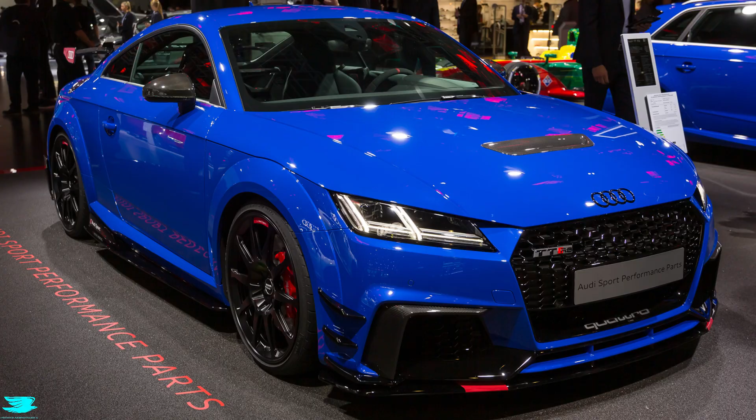The Audi TT RS is a sweet car, and it can go from 0 to 100 in just 3.7 seconds, way faster than I expected at least. But its body kit from an aerodynamics point of view has some good points, but is pretty bad overall.

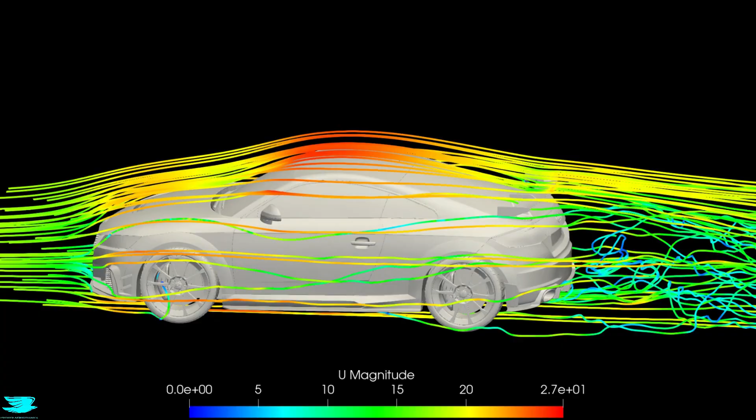And I feel bad for saying that because one of your amigos, George, commissioned us to simulate his car. It's the truth though. As we'll see, there are two major flaws and one minor one. But the good news is that we'll also cover some easy ways to fix these flaws. So George, sorry dude, but hopefully these fixes will make up for it.

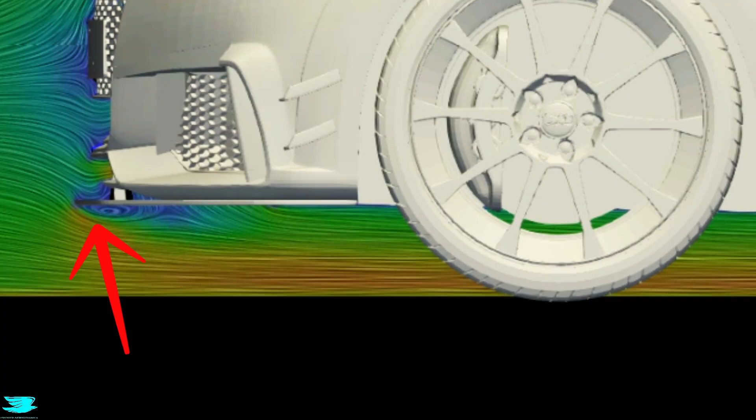The Audi TT RS has some sweet additions. It has a cool front splitter, a diffuser with strakes, a large rear wing with swan neck supports. They're really cool. They're those supports that wrap over the top of the wing. And my favorite, this vent in the hood. For those interested, we actually did the regular Audi here a while back. This is the improved version, the RS.

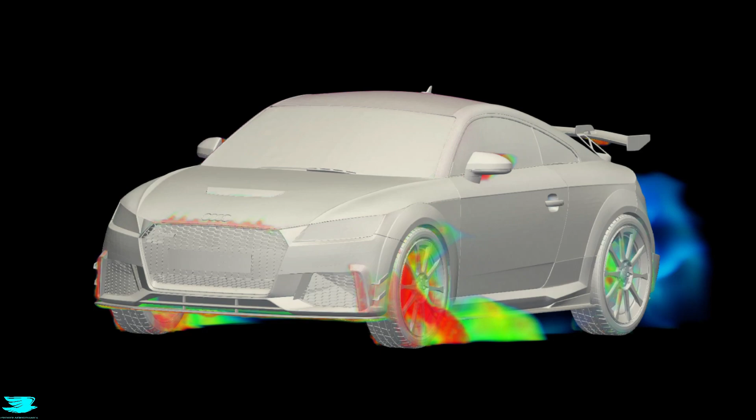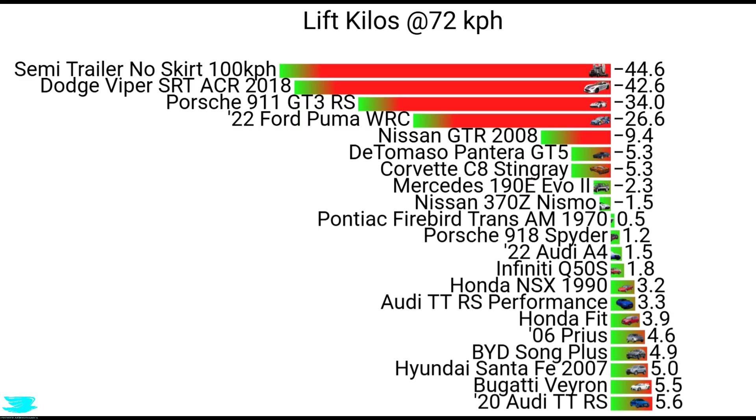And despite the weaknesses of the body kit, which we'll cover later on, it is still an improvement. So for example, the lift produced with this version dropped from 5.6 kilos to 3.3, so it's a nice little drop. But on the other hand, the drag coefficient increased from 0.32 to 0.34. And that's to be expected because usually when you cut down on the lift produced, the drag will increase.

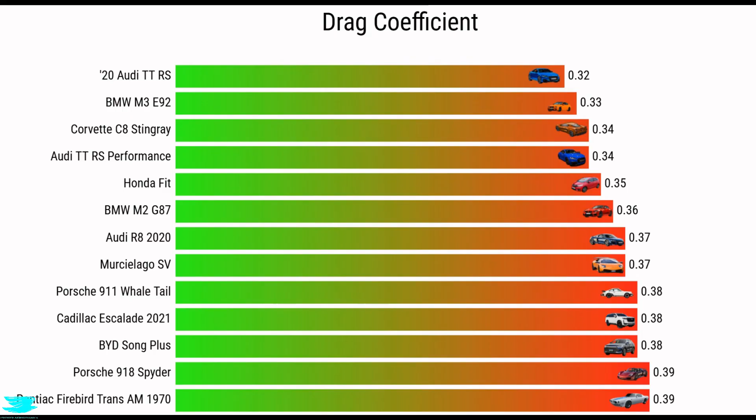Let's cover the body kit parts and their locations and the effects on the global and local aerodynamics. First of all, the front splitter. This is the center plane colored in the velocity in meters per second. Zooming into the front, if you've watched some of our other videos, you'll know exactly what I'm going to say here. So, the flow separates underneath the splitter, and that's really bad.

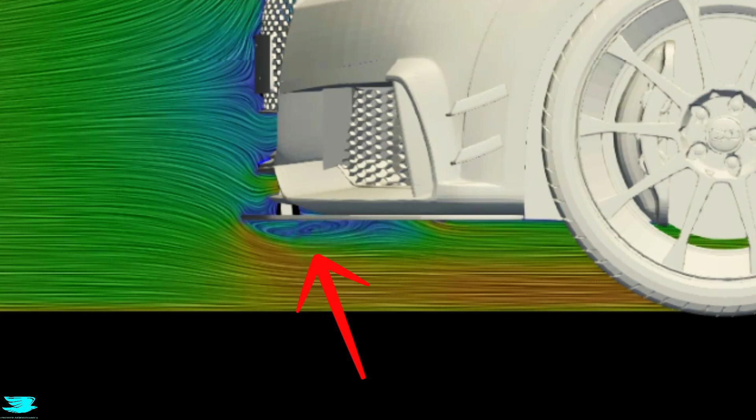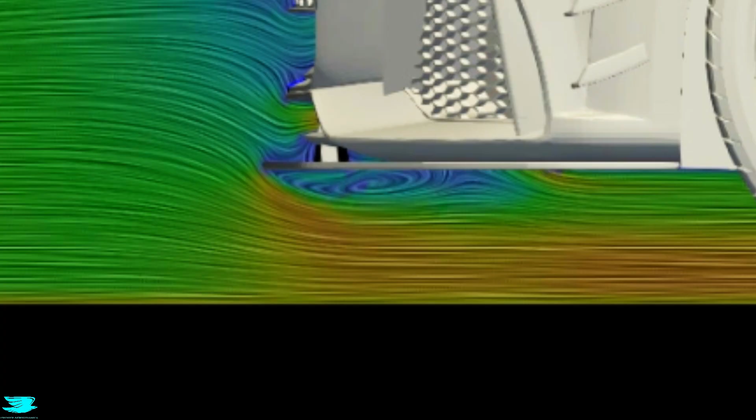So the splitter is definitely too sharp and not extended forward enough. You can have one or the other, either sharp or short, but not both. Having both like we have here, where the splitter is only a couple inches long and very sharp, means that the flow that's traveling around the edge is highly angled to the splitter's edge. And because the splitter isn't rounded at the front, the flow just separates.

That's bad. If you extend the splitter forward more, you can see that the flow is straighter up here. That's because it isn't affected by the front of the Audi much. The reason why the flow here, close to the Audi, is curving so much is because it's slamming into the front of the Audi and then being forced to turn and flow elsewhere. So the best fix is to extend the splitter forwards. That would make the front edge of the splitter slice through the straight flow upstream cleanly.

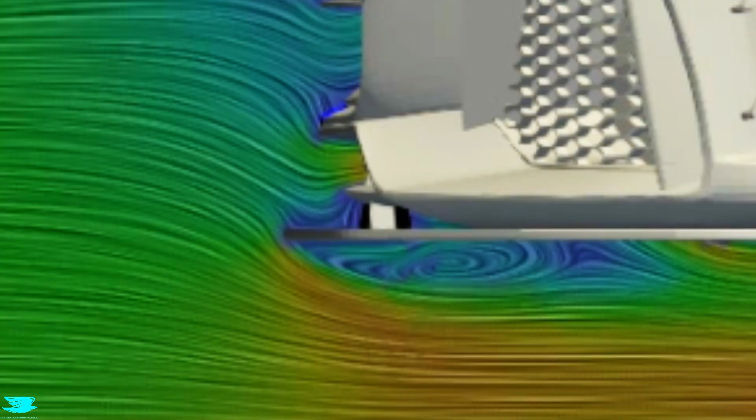But as I mentioned, this wake isn't just a splitter's doing. This wake is so large also because some flow can go through the front of the Audi. What happens is the flow comes along and some flow goes through this opening and then downwards underneath the car. That makes this wake under the splitter larger because if you don't have this flow from above coming down, there'd be more room here for the flow underneath to go up. And because you're shoving all this flow underneath the car, that would then naturally force that flow up and reattach to the top of the splitter earlier.

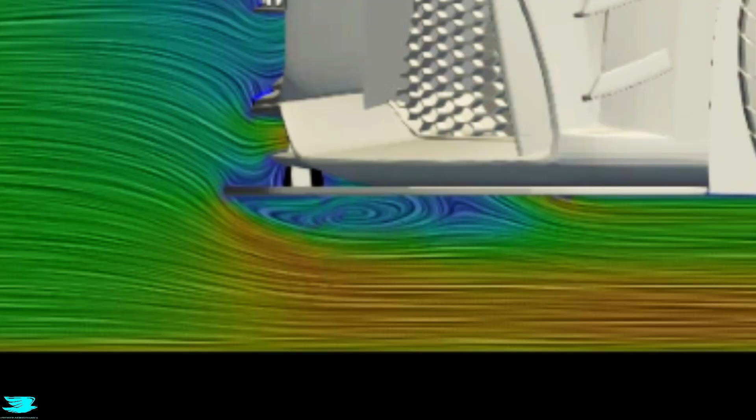So while this additional flow entering above and flowing down doesn't cause a flow separation over the splitter to begin with, it definitely makes it larger because the flow can't reattach as quickly as it usually would. Despite that, if I were to do anything in this region, I wouldn't actually close off the front. That's because I think that it would arguably make the car worse. And to understand why, let's look at this front and think about what's happening.

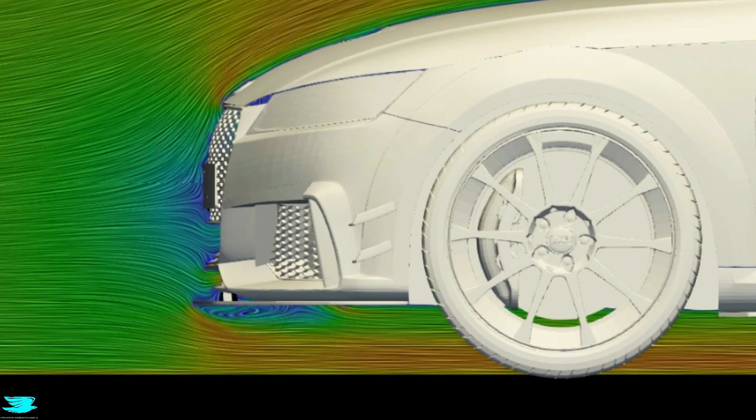So we know that the flow over the splitter is highly angled to begin with. That's because of all this flow at the front of the Audi slamming into it and having to redirect. If we close this little slot here, that will just cause more flow to do the same. So the flow over the splitter will be even more angled, and that's not even the worst bit.

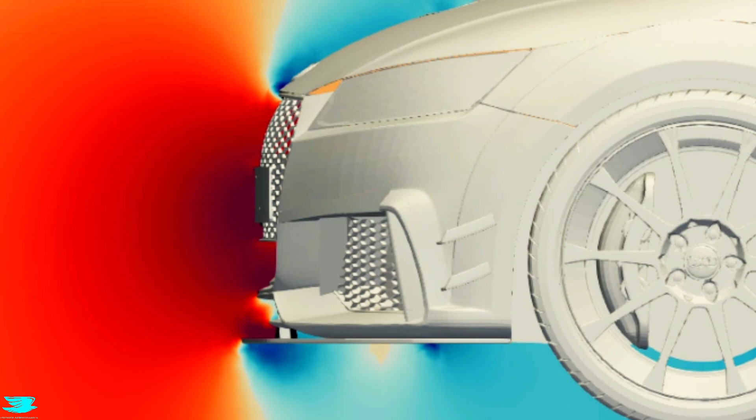While this wake under the splitter is bad, the flow hitting the front of the Audi and decelerating is worse. That's because you're dumping so much of the flow's kinetic energy into it and wasting it. That's even more drag. So closing this little slot will make it even worse and you're going to waste more kinetic energy. So there'll be more drag from that.

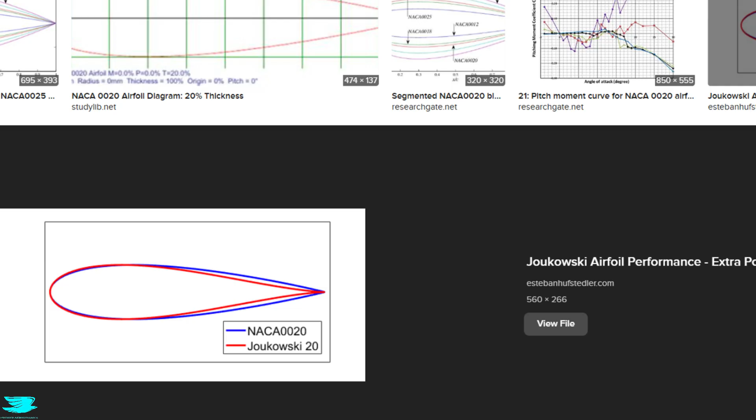So don't close the slot, and in fact, I wouldn't even extend the splitter forward either. That's probably because it's a little complicated. The easiest way to fix here would actually be to round the underneath. You'd have to attach additional material, maybe carbon fiber, and then the best shape would literally be taking a symmetric airfoil and thick one, like a NACA 0020, and slicing it down the middle, then sticking the underneath into here. That would make a minimal difference to the appearance of the car, but still give the flow a much better surface to flow around.

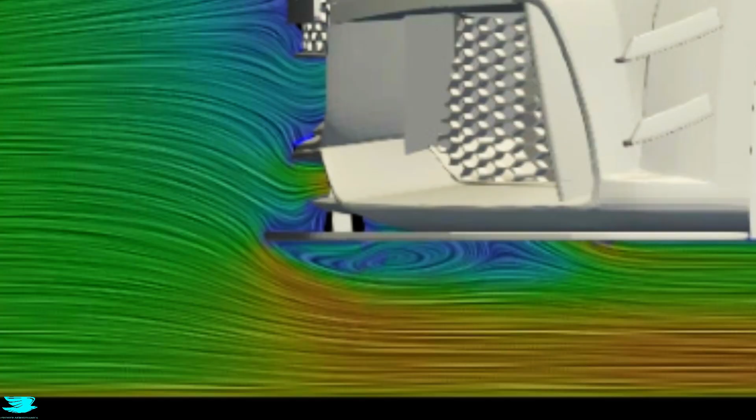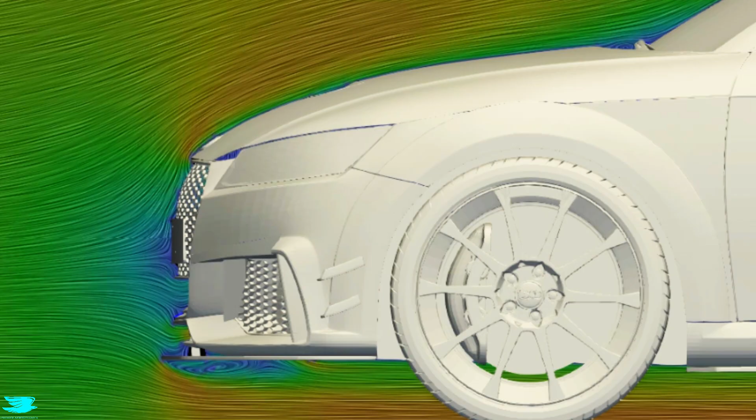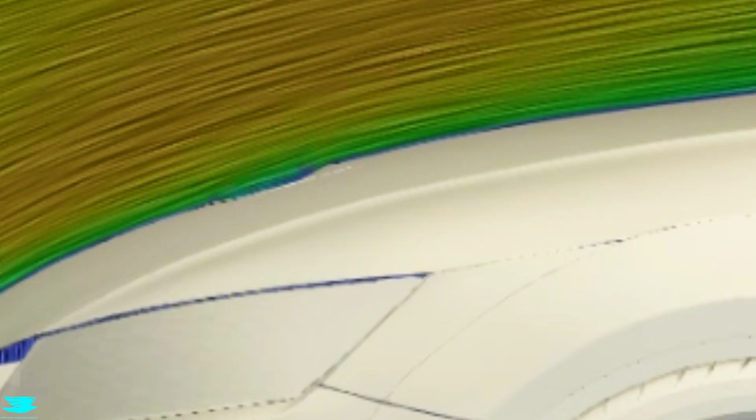Now, I think this vent is pretty good. If you look closely, it seems like the boundary layer just after it might be a little thinner. It's tough to tell, but at the very least, we can conclude that with this exit flow speed specified, the flow over the hood isn't disturbed too much, and possibly not at all. So while that means that the hood flow isn't being improved here, it isn't being made any worse. And if you have another way for the flow in the front to exit from, that also helps reduce the cooling drag a little, as long as the piping isn't too windy.

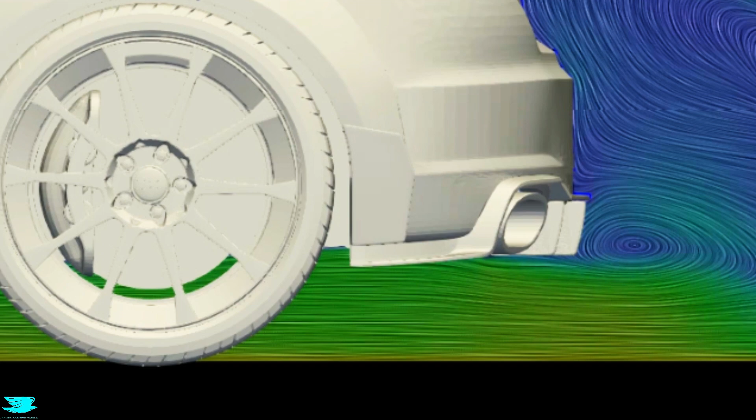Anyway, let's move to the diffuser because it's supposed to be better, but it's not. It's pretty bad. So to begin with, the diffuser features strakes. Now I'm not sure the exact reason why Audi decided to put them on here. Usually strakes are added to straighten the flow over the diffuser and isolate each region from the rest of the flow. For example, behind the rear wheel, you get a wake. If you don't have strakes here, the wake will then meander around and bleed into other regions too. That's bad for a diffuser because you want to have clean flow over it. The better the flow is going over it, the better it can perform.

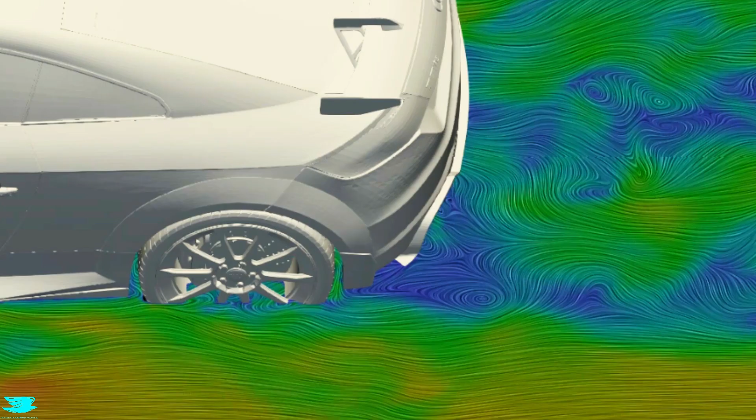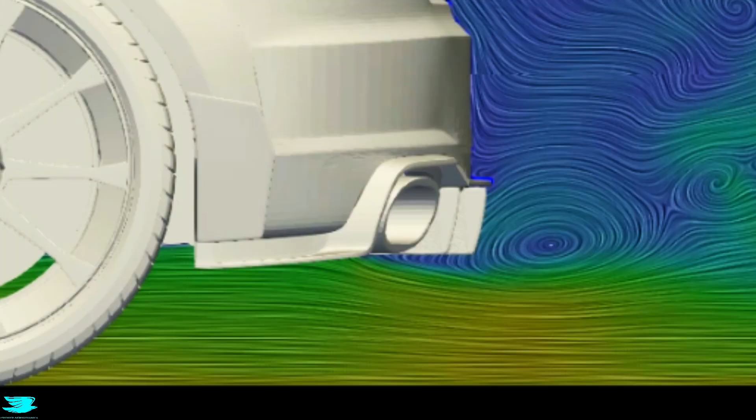One major reason is because if you have slow moving flow going over the diffuser, like you have from the wake of the rear wheel, that means that the flow doesn't have as much energy, so it's likely to separate. But by adding strakes, you reduce that tendency. Audi added strakes onto the diffuser, and it looks good, but the diffuser isn't very good still. So the flow is obviously separating here. You can see that the flow speed is really low behind it, and it's also angled down. If the flow stayed attached over the diffuser in this plane, then the flow should be faster and it should be kicked up more. If it did that, then downforce would be produced and the drag would drop.

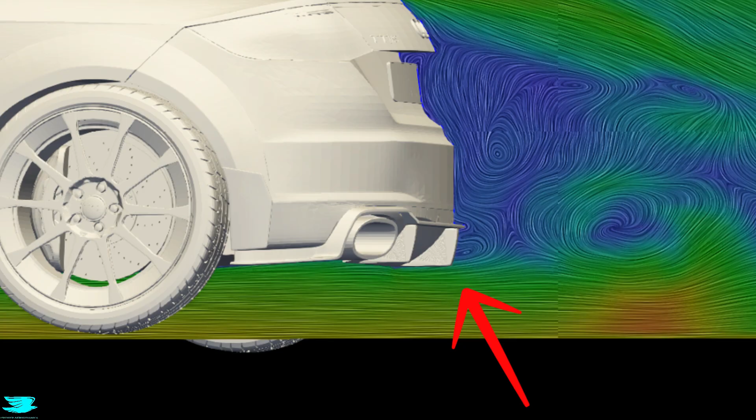To look at this further, we have this snapshot from behind and looking just up a little. This plane is in between two strakes that are very close together, and after I saw this, I thought that maybe that was just a bad region. If you have two strakes right next to each other, maybe the boundary layers were growing around them quite quickly and enough to stifle the flow through them. Or maybe having the strakes so close to them would kind of choke the flow in this region. So I took this snapshot, which is 15 centimeters to the left, and now between two strakes which are spaced very far apart. We still get the same problem here. So it seems like this diffuser is just doing poorly across its width. The strakes aren't the problem, it's the diffuser.

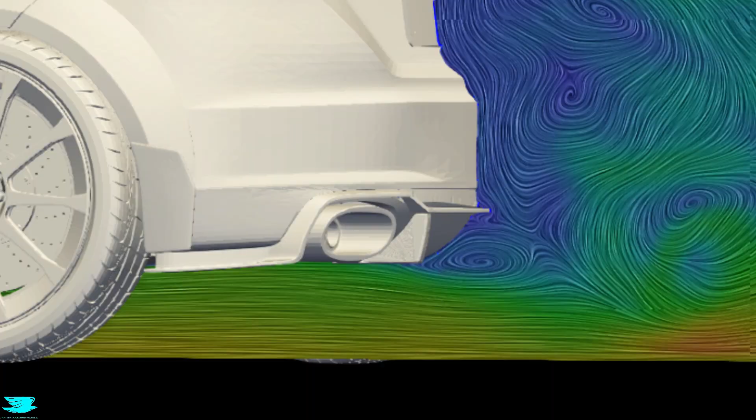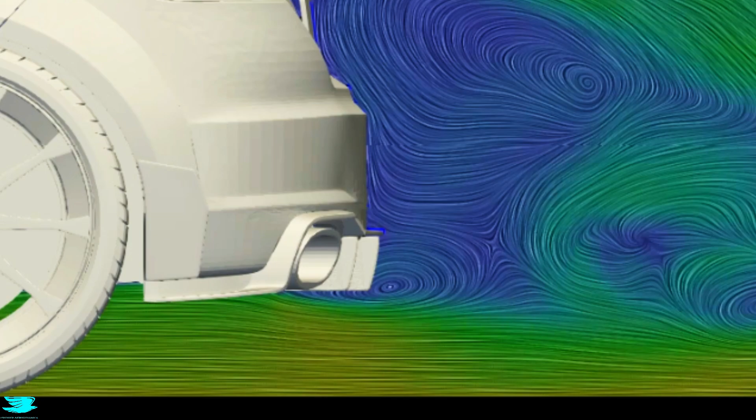If the flow didn't have enough energy at this 72 kph speed, then maybe at a faster speed, it would have enough energy to get around that curve without separating. So I did a quick simulation of this exact setup, but now at twice the speed, 144 kph. We still get the exact same problem though. The flow over the diffuser is just bad.

And that tells us a couple things. The first is that the speed isn't the problem. This body kit, at least the diffuser, doesn't perform any better at higher speeds than lower speeds. The second is that the only real way of fixing this easily is probably to use something like vortex generators.

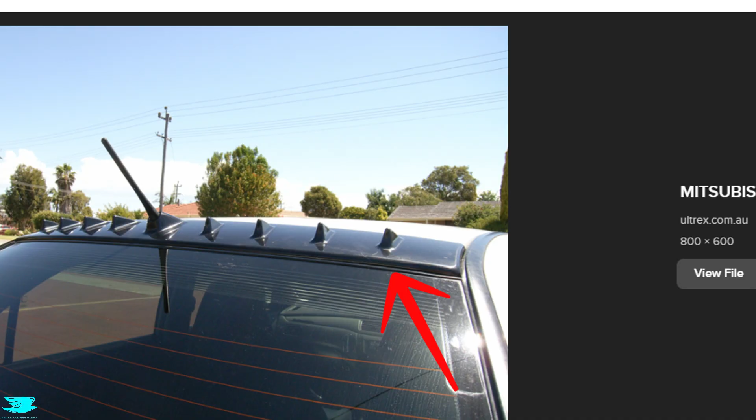The idea is that you place vortex generators just ahead of the point where the flow separates from. Here is about where the diffuser starts. That will then churn the flow up close to the surface in the boundary layer and give the flow close to the surface more energy to stay attached.

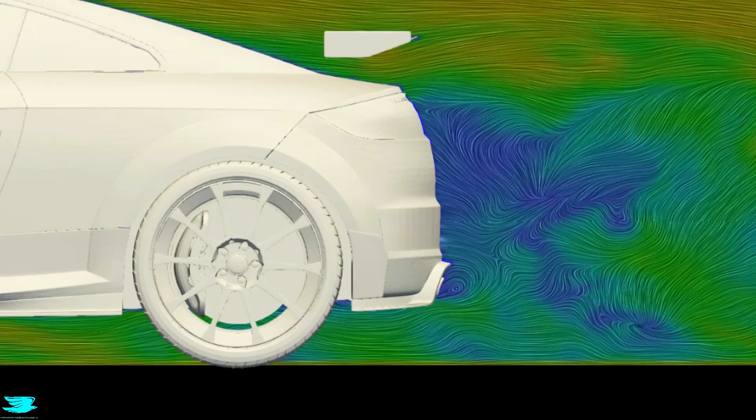And I just want to note that this idea of using vortex generators over the diffuser isn't mine. There are actually a few cars out there doing that now, but from what I know, the first person to have this idea was someone who I actually worked with. I'll just say his first name, Piros. I won't say which OEM he's working at now. He hasn't told me that he's okay with me telling you that. But this was his idea back in like 2015.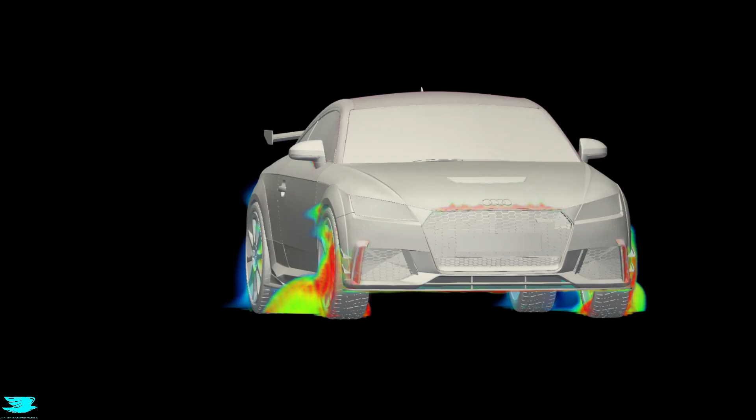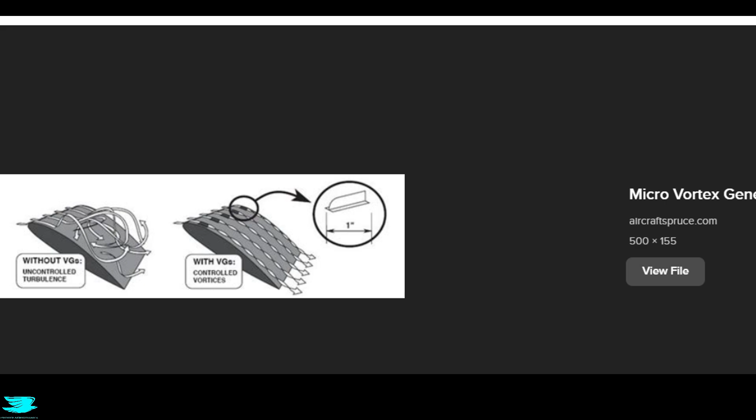Now, while vortex generators will really help keep the flow attached, and as a result, the wake will be smaller and the drag will be lower, vortex generators produce a little bit of drag themselves. It's not a big deal, but it's something. If you want to reduce the drag too, then you could use something called micro vortex generators. As a rule of thumb, their height is about 1/3 of the height of the boundary layer. They still give most of the effect, but without any of the pressure drag addition.

So here, looking at the boundary layer at 72 kph, I'd say vortex generators of about 1.5 centimeters in height would suffice. Also make them counter-rotating because they're usually more effective.

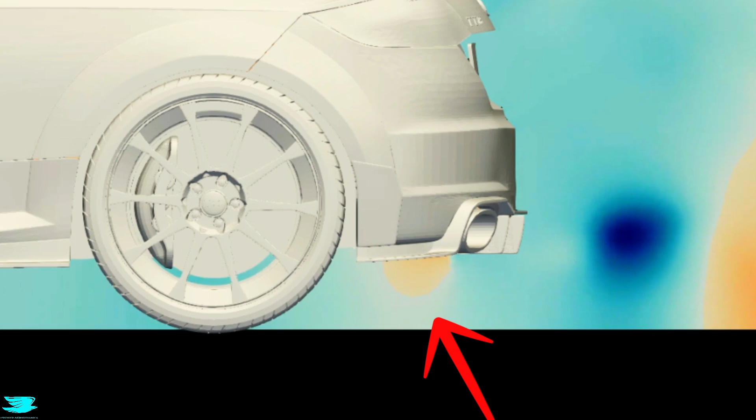Finally, if we look at the pressure plot, things get even more alarming. Not only is the flow separating over the diffuser and creating a larger wake, but we also get pretty high pressure underneath. That's terrible for downforce production. In fact, with all this high pressure pushing upwards, the diffuser might even be producing lift, the opposite of what it should be doing. So this really needs to be fixed. If nothing else were done to the car, and only this was corrected, that would be a big win.

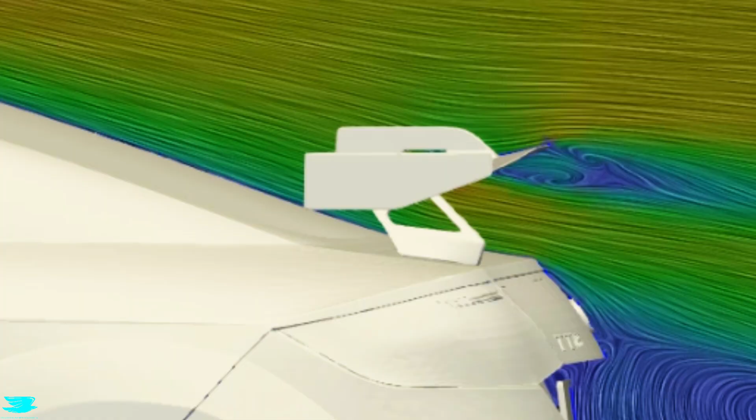Let's now move to the rear wing. It's really impressive. There are some good points about it. Perhaps my favorite is that it uses end plates. Anytime a lifting surface like a wing uses end plates, that greatly reduces how much the tip vortices can roll up, and that then reduces the induced drag. So that's great. But in the center plane, it's pretty obvious that the wing isn't performing that well. There is a very large wake underneath it. So the flow is separating over it and it's partially stalling.

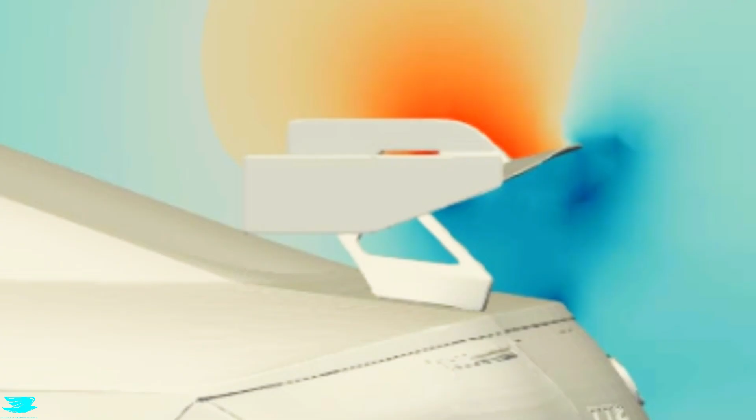Let's look at the pressure plot to see what kind of forces are being produced. The good news is that the pressure on top is very high and the pressure underneath is very low. So we have a pressure difference here and hence downforce is being produced. And that's the thing, just because a wing is stalling doesn't mean it's not producing downforce or lift. It's entirely possible to have a wing stalling but still produce a decent downforce. It might not be the most it can produce, but it's still decent. That's effectively what we have here.

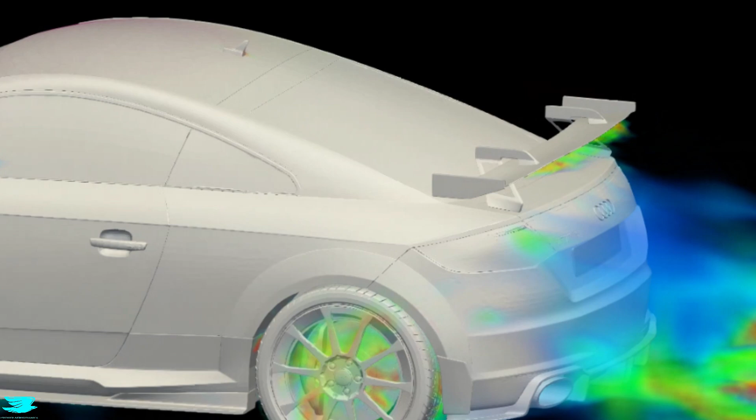The bad part comes from the additional drag you get. So while you might still produce downforce, you produce a lot more drag too. So it's now costing you more to produce about the same amount of downforce or even less. So why does this happen?

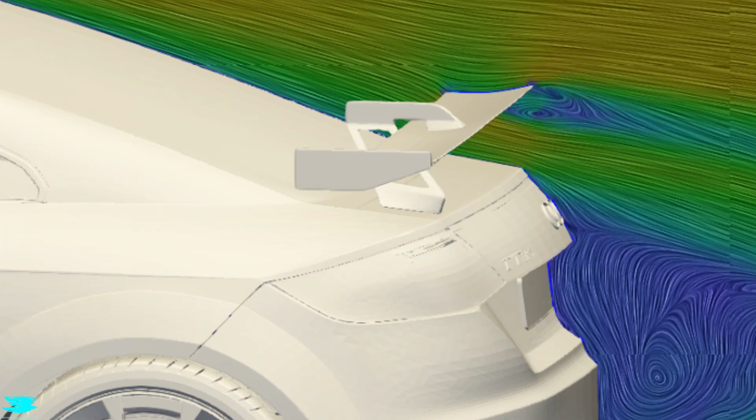Well, fortunately for me, my PhD was actually in wing aerodynamics. The main reason why there is so much separation over the underside is that this wing is pretty thin. It has about a 12% thickness to chord ratio, which while it's not super thin, it can present problems, particularly when it's at low Reynolds numbers and on highly cambered wings. Here we have both. Given the flow speed hitting the rear wing, the Reynolds number is only about 200,000.

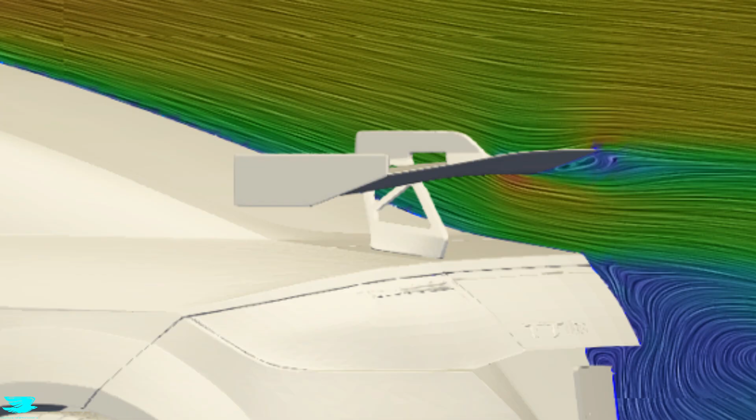What that means is that the viscosity is relatively high and will do a decent job sucking energy out of the flow. The higher the Reynolds number is, the less effective the viscosity is at doing that. Also, this wing is highly cambered, so it's bent quite a lot. But why are all these things bad? Well, wings, and in particular thin wings, are very sensitive to the flow speed. The faster the flow speed is, the more the flow will remain attached. At a Reynolds number of 200,000, that's pretty low, and we're in the region where the flow is very sensitive to the geometry now.

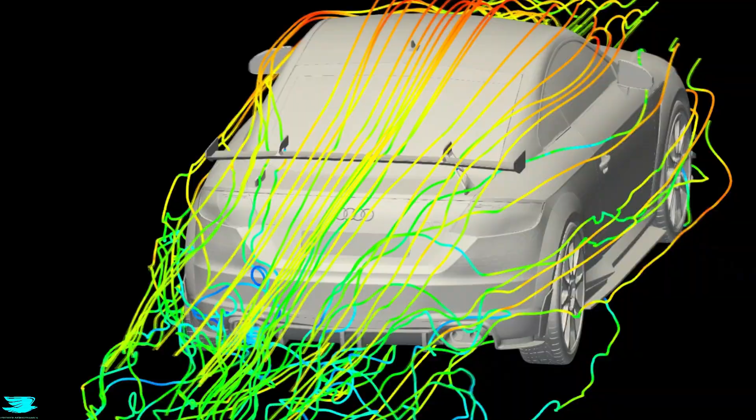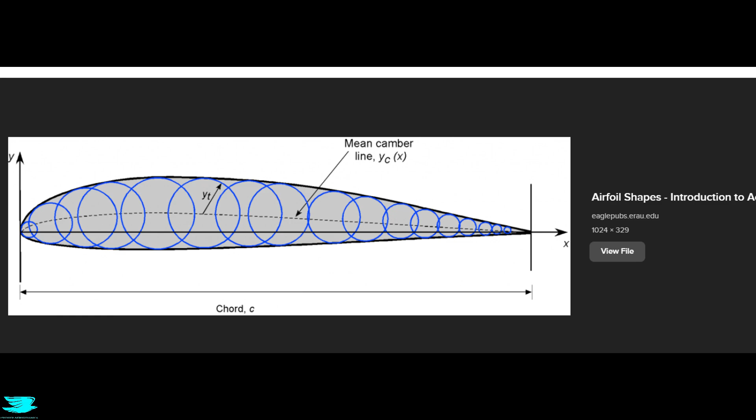Then on top of that, adding all the curvature from the camber just makes it even more difficult for the flow to turn around that underside and remain attached. So to solve that and keep the flow attached more, there are a few options. The first is to make the wing longer. That will help the flow become more turbulent and stay attached. But here that won't really work because if you simply make the wing longer and somehow keep the camber and maximum thickness in the same location, the flow will still be pushed pretty hard and probably separate.

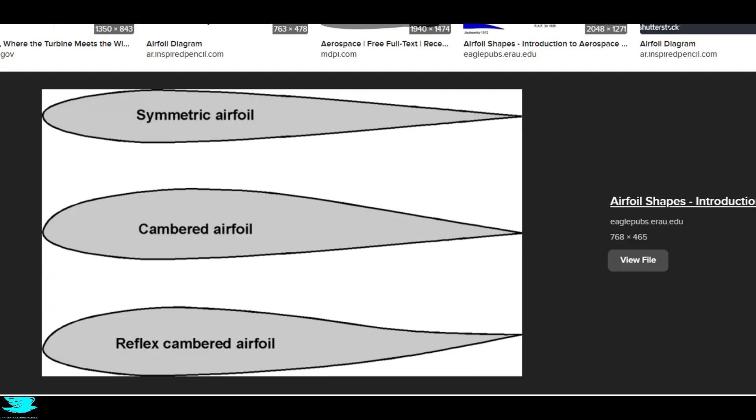Another way to solve this problem is to then reduce the camber and increase the thickness. That will work better, but then requires a new wing. The third is to pitch the wing up more. Here that will align the top surface with the flow more, and reduce how much the flow will want to separate over it. While that will work, it will also probably reduce the downforce. Another way is to potentially drive faster. That's always good. But here it's also good because you then give the flow more energy to stay attached.

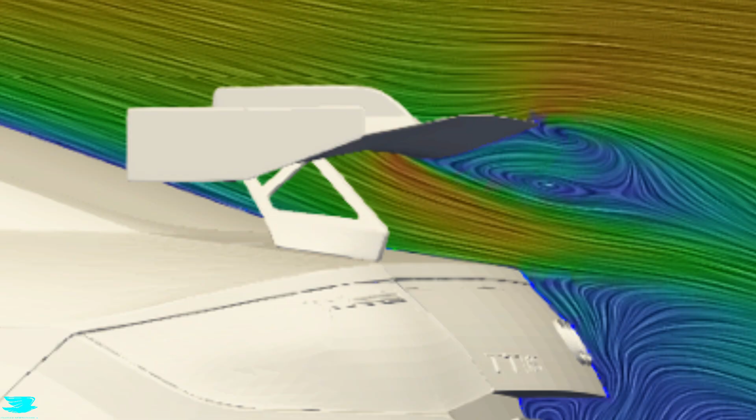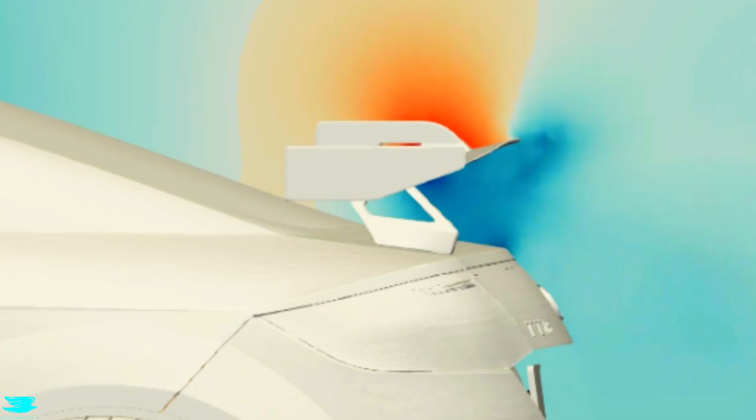But to see if that's a viable option, we actually ran the simulation at double the speed, so 144 kph. We have a few snapshots of the flow behind the wing, and unfortunately the flow is still separating here, and pretty similarly too. So even doubling the flow speed is nowhere near enough to solve this problem yet. At this rate, you might need to break the speed of sound to get the flow to stay attached, and then at that point, you might get shock-induced separation anyway, so you're back to square one. So all these potential fixes don't really work here.

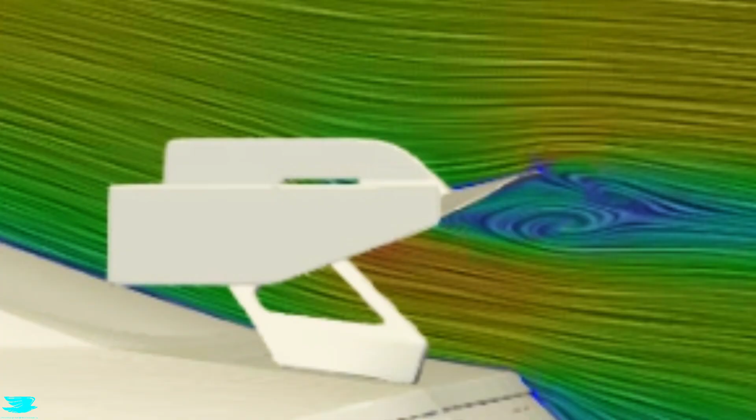What we really have to do is somehow give the flow close to the surface enough energy so it stays attached, but is still easy for us to do. For that, we need to make the boundary layer turbulent. To do that, we can either use some kind of vortex generator again, or something called a boundary layer trip, for example zigzag tape. If you were to use vortex generators, then the same guidelines we talked about earlier for the diffuser are also applicable here. In a nutshell, put counter-rotating ones just before the maximum thickness point and try to make them around 1/3 of the boundary layer height.

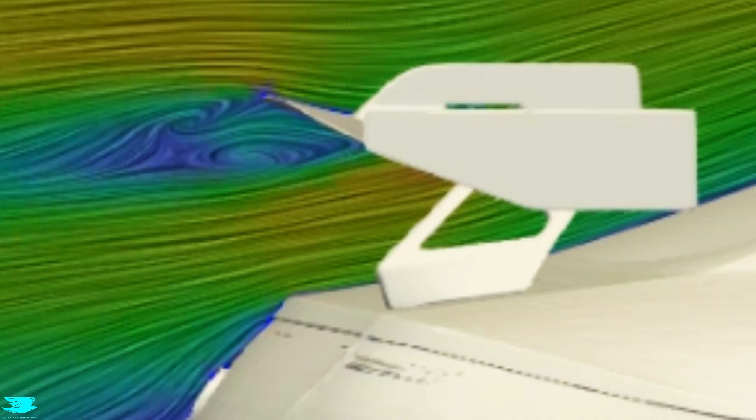Alternatively, zigzag tape is great because it's much easier to use and install. Going that route, you literally just stick it about 5% back from the leading edge, and from wingtip to wingtip usually, but it depends on the flow separation characteristic. The way zigzag tape works, and any other boundary layer trip really, is that it creates strong disturbances that then trigger the flow close to the surface to become chaotic. While that might not sound great, what's actually happening is the flow close to the surface is now faster. That's good because it can push forwards more and stay attached.

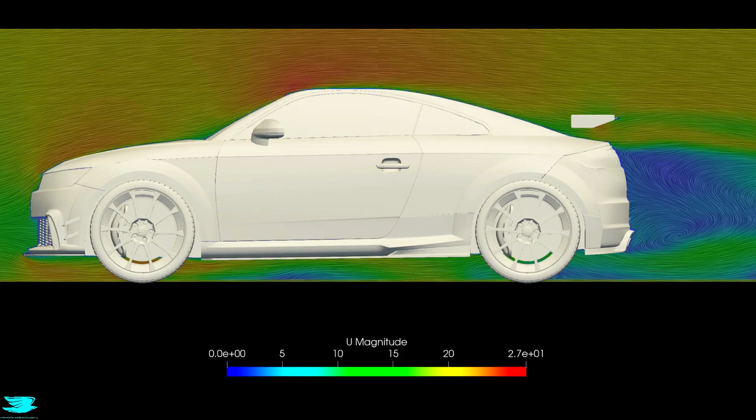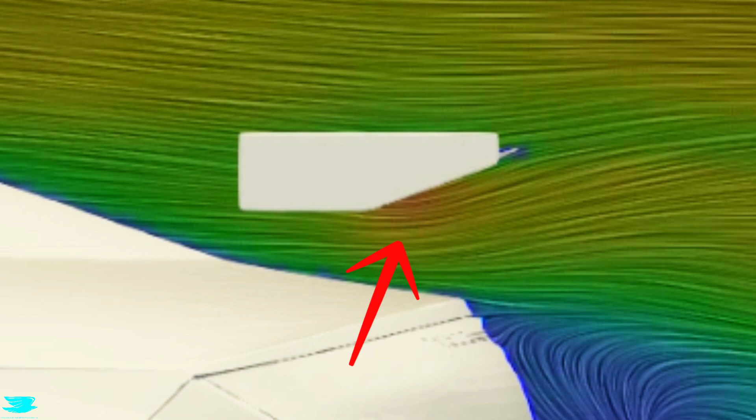But everything we've talked about so far is just in the center plane. Let's jump over 0.6 meters to the left to see how the wing performs there. Interestingly, the flow underneath is now attached here. So in the center plane, the flow was separating. 0.6 meters to the left now, the flow underneath is great. What is happening though? It might be tempting to say that the wingtip vortex is rolling down underneath and squashing the flow up to the underside, but I think there's more to it than that.

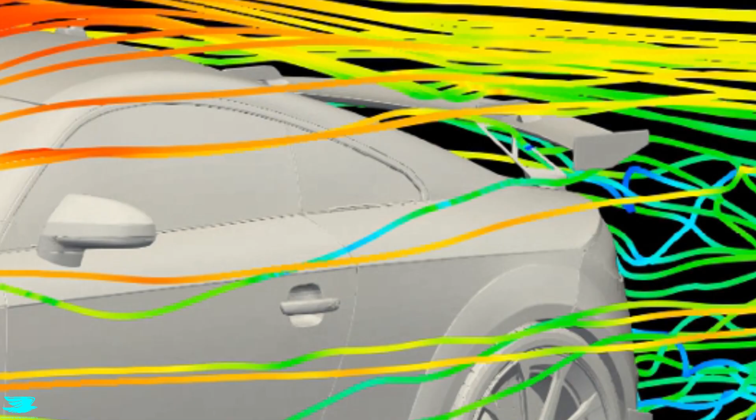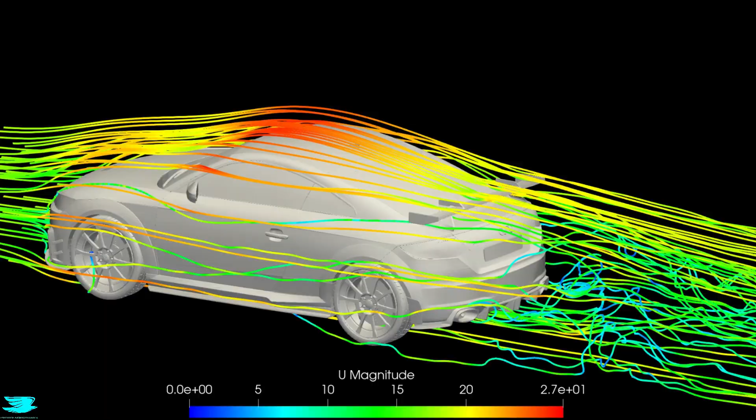That's because this wing has end plates, so the wingtip vortex is going to be weaker, and looking at the streamline plot, we see another major effect. So look at the streamlines going around the rear edge of the car, the C-pillar. They shoot underneath the wing at around this location, and they're now injecting the underside of the wing with more energy. It's kind of like running a race, almost passing out, then eating a pizza, and getting a boost of energy. So the wing is now doing awesome. That tells us that really only the middle part of the wing is performing poorly. And that's because it doesn't have any high energy flow being injected to where it needs it.

So the question then becomes, how much of the rear wing should we have these vortex generators or zigzag tape over? Well, this plane, which is just below it, shows the middle section. Maybe 10 or 20 centimeters in either side is good. That's where we get this wake.

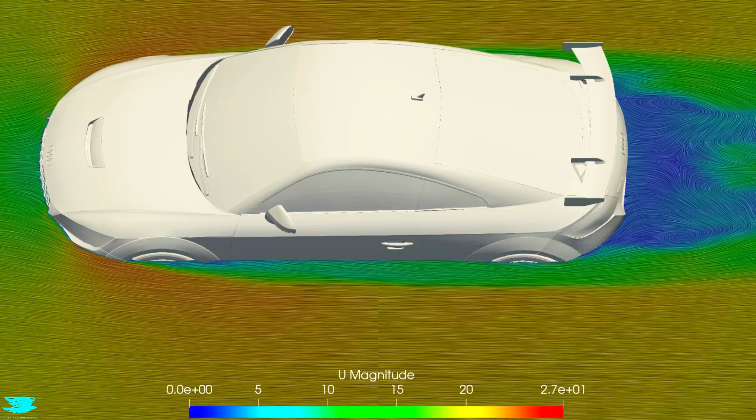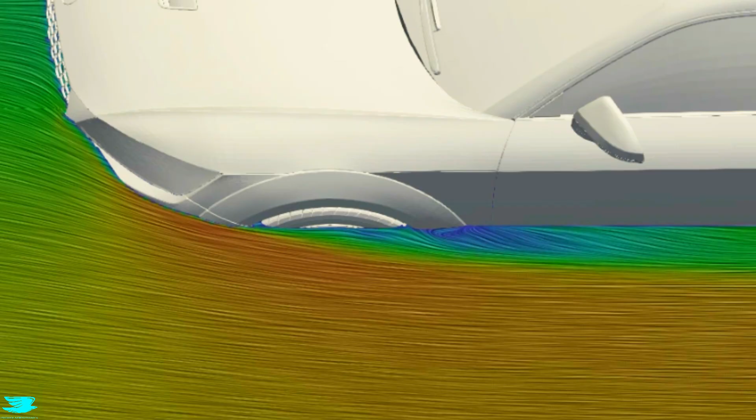This plane is 0.6 meters off the ground, so 2 feet. I'm quite surprised with the flow on the front wheel. It's pretty good. And that surprises me because the front splitter and even the canards on the side are messing with the flow a lot. And yet, the flow on the front edge is good. In a way, it kind of acts almost like an air curtain because it speeds up so much, and so it shoots around the side faster.

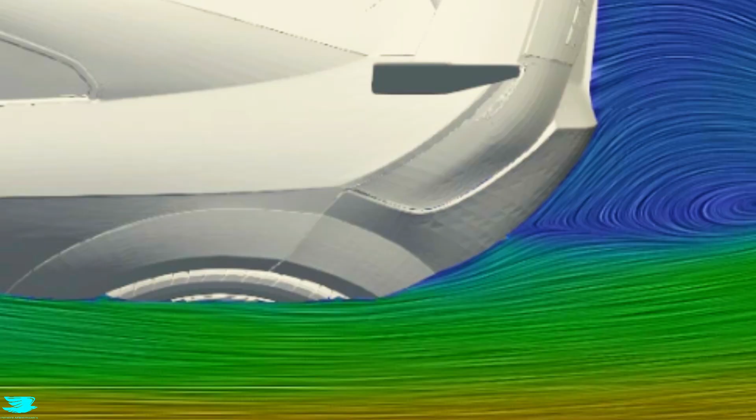I also really like the rear edge. There's a fairly prominent rear wheel house, but the flow still stays attached around it and the rear edge. We've seen with a lot of cars how the flow separates around the rear edge, blows out, and creates a much larger wake and hence drag. Here, even with the wheel house, it doesn't do that. That's impressive. As a result, the Audi enjoys a lower drag because of it.

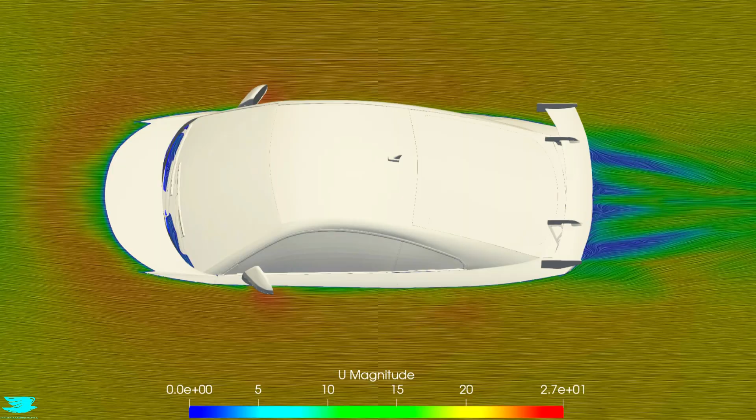The same is true higher up at 0.9 meters off the ground. There's not only no wake along the entire car, but the rear flow just zips in and there's almost no wake in general. That's really impressive here. And one reason why the TT has such an impressive wake here is because the rear wing is mounted fairly high. We'll talk more about that in a sec, but just here, mounting the rear wing above the trunk allows high-speed flow to race down the rear window and shoot into the wake.

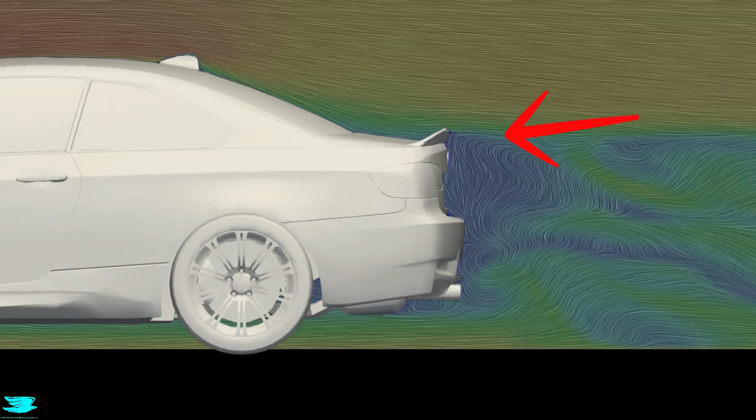An alternative approach that many cars have is putting a rear spoiler on the back, so that little lip that just flicks up. For how small they are, they're very potent. But it also increases the wake size because the flow over the rear is kicked up. The rear wing doesn't do that, and if designed well, it won't have much of a wake either. Unfortunately here, we do know that some of the rear wing is stalling, so a large wake is formed behind it.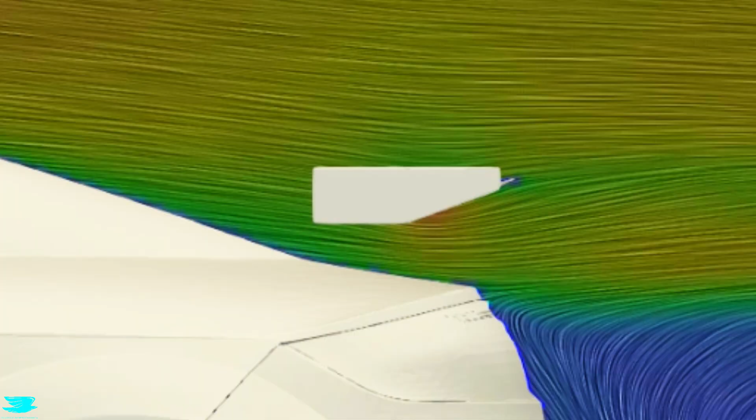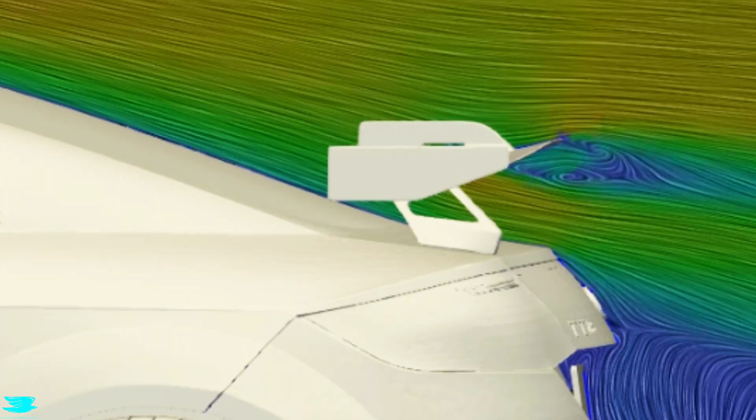Now I said that this rear wing is mounted high. It's pretty high, but not quite high enough. Looking back to the center plane, you can see how the flow hitting the rear wing is greeny yellow. That's fine, that's quite fast, but if you mount it just a few centimeters higher, you'll get into even faster flow. That will then make the wing create more downforce because downforce produced is proportional to the velocity squared. What that means is that a little bit of an increase in the speed has a large effect on the downforce. Also, I should say that this is not just valid for this speed, because doubling the speed, we got the exact same thing. So mounting the wing higher is what you need to do.

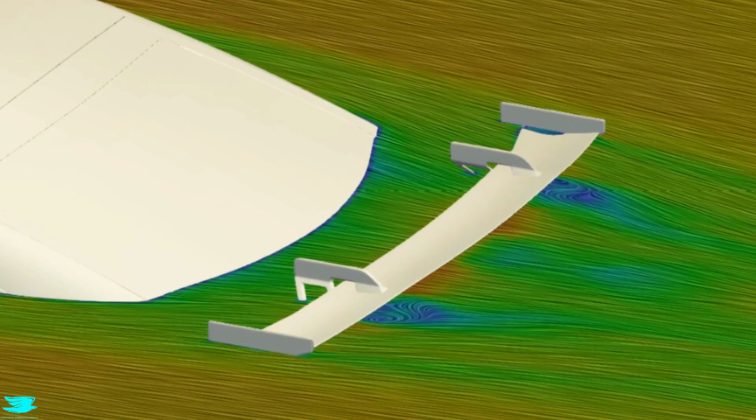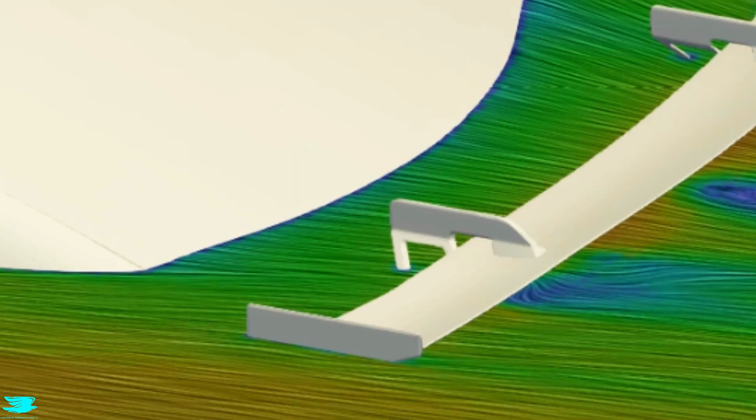Speaking of mounts, in this plane, which is 105 centimeters off the ground, they're not great. There are large wakes from either one of them, and then the wake from the flow separating underneath the wing. This is one thing that many mounts don't get right. You can see that they are straight, but the flow hitting them is at an angle. That's because the flow wraps around the rear edges and flows slightly inwards. They then hit the mounts at an angle, and because the mounts are just sharp edges, the flow separates around them and creates wakes and drag. This is particularly noticeable near the mounting points of the wing.

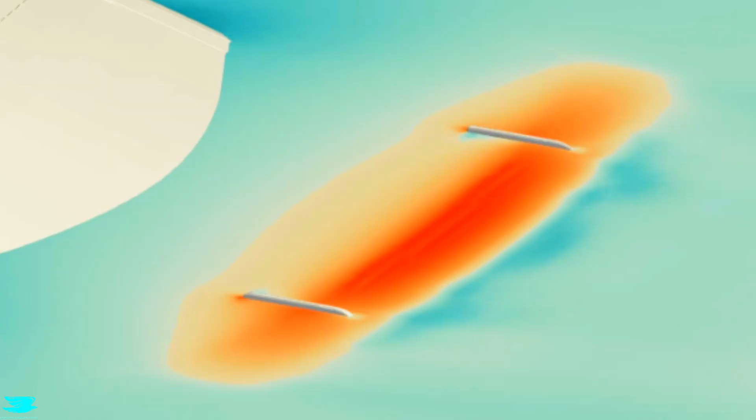On top of the wing, the swan neck mounts wrap over and have these little plates. From an aeronautical point of view, they're cool, they're like little wing fences, so that's awesome. But in this plane, which is 1.13 meters off the ground, they're fine. They're in line with the flow enough to not have flow separation around them. As for the aerodynamic effects though, they're actually really impressive. So this velocity video doesn't show it much, but in the pressure video, we now see how awesome they are. Look at how much redder the flow is just inside the mounts, the wing fences, compared to outside. In other words, there's higher pressure in the middle section than on the outsides. That's because of the wing fences.

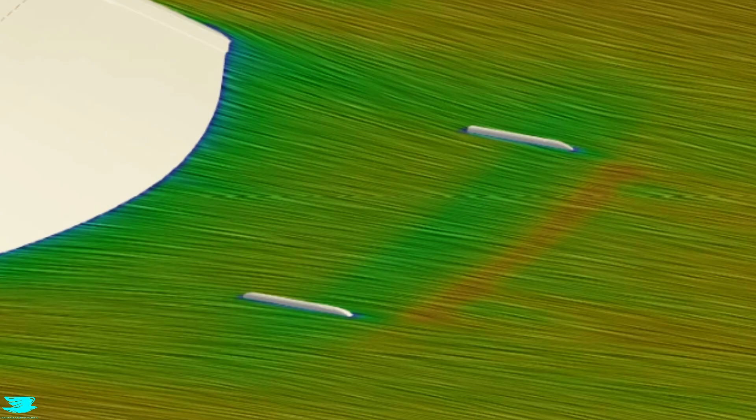While this wing does have end plates, which is great, no end plate is perfect though, unless you go to extreme versions like box wings for example. So some wingtip vortices will still form. That means that the flow over the pressure surface, so here, the top surface, is going to curve towards the wing tips. As it does that, it loses high pressure and becomes slightly lower pressure. That then migrates over the rest of the surface and the entire surface is affected. Here, the wing fences segregate those outer flows from the inner flow. The inner flow can then maintain a higher pressure because of that, and that then increases the downforce. So swan neck mounts are having a really cool effect here, and you don't see that every day.

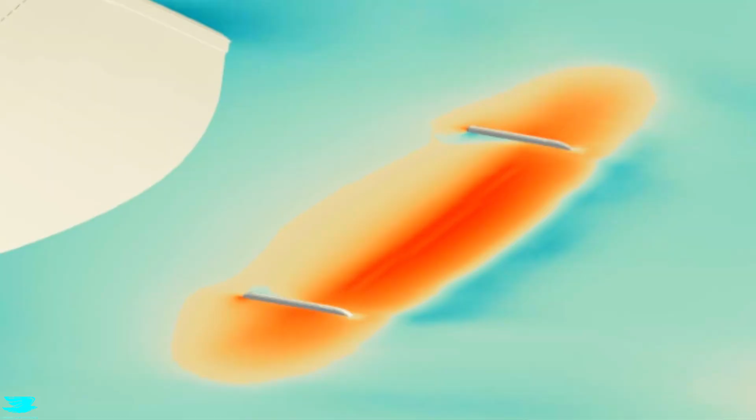So while these modifications have some great points, they have some bad ones too. But the good news is that many of them can be fixed quite easily. So the drag coefficient, which is 0.34, can be dropped a little, and the downforce, which is currently minus 3.3 kilos, could be improved too.